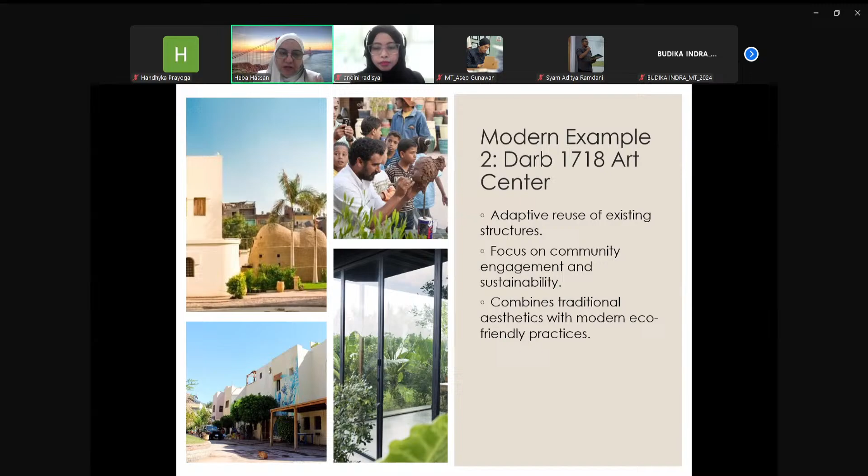Combines the traditional aesthetics with modern eco-friendly practices. They are using it to engage the community with an art and architecture center. So it is a good example for engaging the environment and having the sustainable and resilient for a long time.

Our third example for the modern examples is Gouna Film Festival buildings. It is a sustainable construction in a tourism hub, and they used it as a sustainable construction for the Gouna Film Festival. There is the use of renewable energy and innovative water management.

They promote green architecture in the hospitality industry. It is like an annual festival for film. It is really a good example for sustainable and resilient buildings. It really saves energy, and it has a good architecture style.

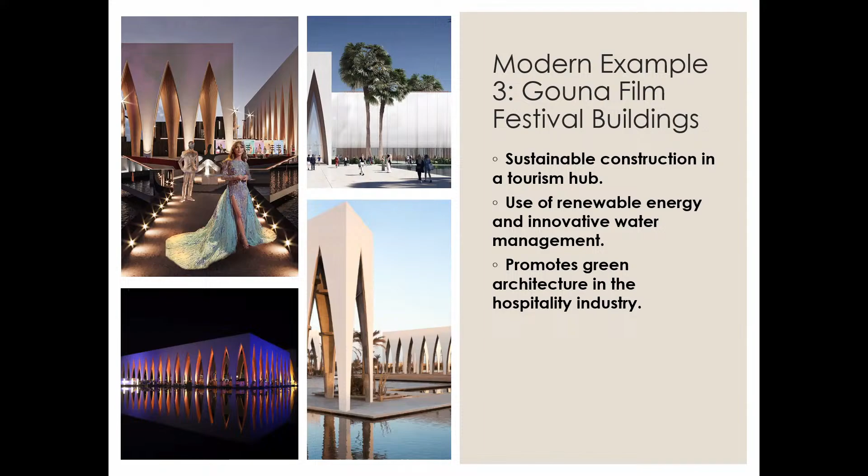Our LEED certified buildings in Egypt - the LEED certification recognizes buildings that meet high sustainability standards. Egypt is home to several LEED certified buildings, setting benchmarks for green construction. So I will show you some case studies that gained the LEED certification. If you want to know more, the LEED certification is a certification for buildings that meet many criteria to reach sustainability and green buildings.

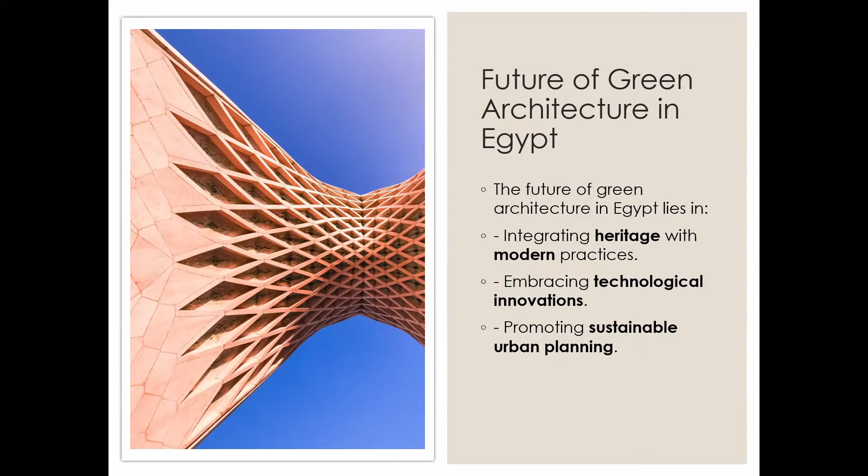Also embracing technological innovations, promoting sustainable urban planning. So we should integrate all three of them to reach the future architecture and future architecture innovation in Egypt. My conclusion and call to action is that green architecture is essential.

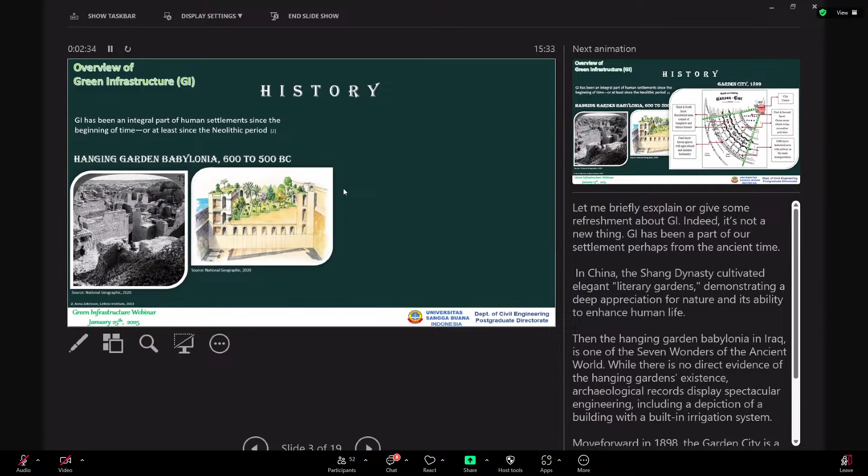In China, the Shang dynasty actually cultivated elegant literary gardens, demonstrating a deep appreciation for nature and its ability to enhance human life. Then the Hanging Gardens of Babylon in Iraq is also one of the proofs of green infrastructure in the ancient age.

And then by the time, there was the proposal from Sir Ebenezer Howard - if you are an architect, I think you're familiar with this concept, the garden city. Ebenezer Howard proposed that we should have a separation between the residential and the industrial area, and also the green part. From this moment, people started to understand about green infrastructure.

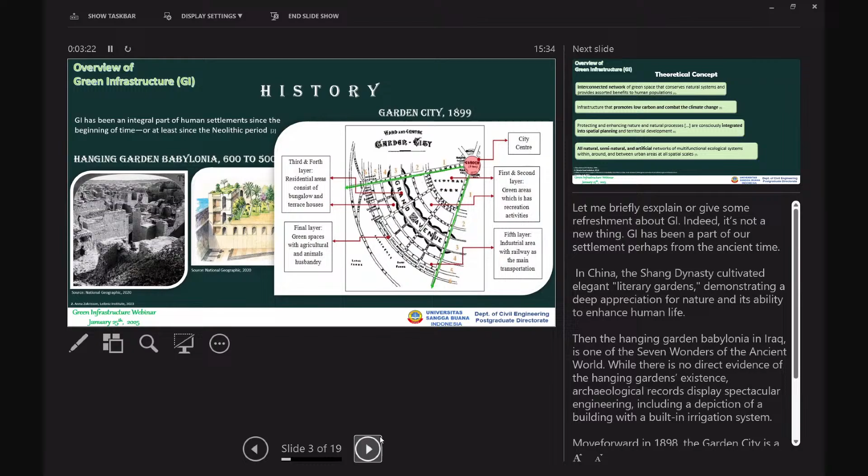This is a little bit of a theoretical concept I would like to introduce to you if your background is not from planning or architecture.

Green infrastructure is the interconnected network of green space that conserves natural systems and provides assorted benefits to the human population. This is the kind of grand theory in green infrastructure.

The second theory is that GI promotes low carbon and combats climate change. The next is that GI should be integrated into spatial planning. And the last theory is that GI is all natural, semi-natural, and artificial network.

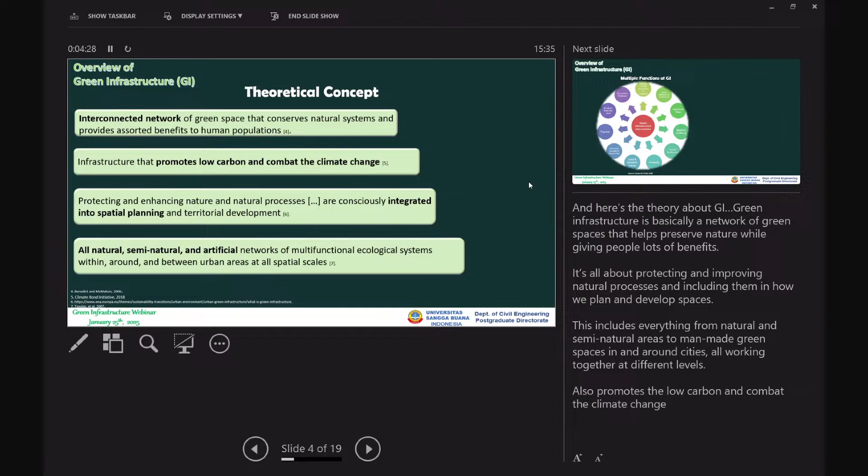So basically, green infrastructure is an infrastructure that connects us with the gray, and also with the support of the blue infrastructure. It cannot stand alone. It's supposed to be supported by green, gray, and blue infrastructure.

Here is the multiple function of green infrastructure, ranging from flood management, climate change adaptation, and recreation and leisure. There are many functions of green infrastructure.

Here are the types of green infrastructure, from bioswale and constructed wetland until riparian buffer - all of them talk about greenery. But actually, the type of green infrastructure is not limited to this list.

It really depends on the situation in the country and the priority. For example, if the priority is about energy, then the green infrastructure will be green energy. So do not limit your perspective about green infrastructure only to this list.

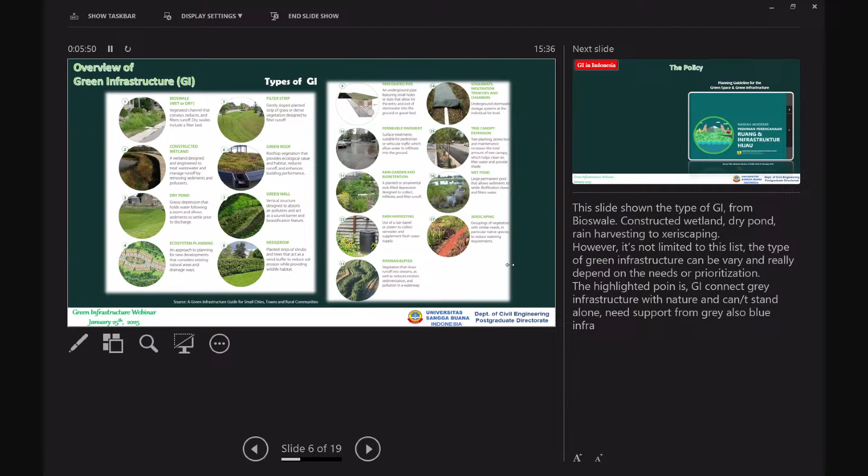In Indonesia, we already have the guideline about green infrastructure since 2018. And the guideline is derived from regulation, law, presidential decree, ministerial regulation, national standard, and also technical regulation.

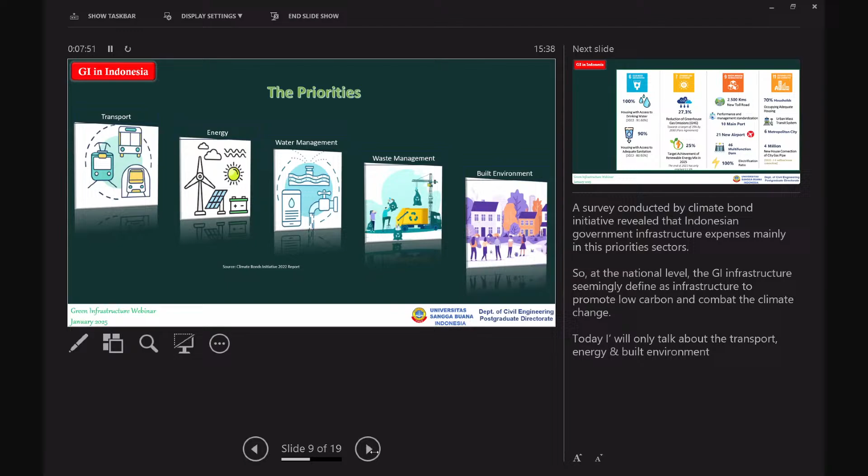Let's take a look at the case study about green transport in Indonesia. Indonesia has toll road construction, already 2,816 kilometers by mid 2024. And since 2020, the Ministry of Public Works and Housing has launched the Sustainable Toll Road Policy.

What is the sustainable toll road policy actually? The toll road managers plant trees along the toll roads, and the total number of trees already planted along the toll roads of Indonesia is 162,011. These are trembesi trees, well known as very effective to absorb vehicle carbon emissions.

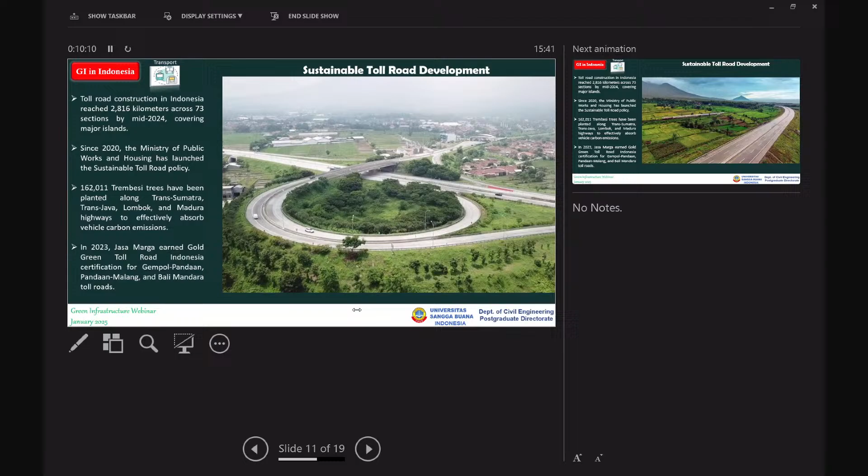The next is the Pandaan Malang toll road, also with very beautiful scenery. And the last one is the Bali Mandara, which combines green, blue, and gray infrastructure.

Sister Heba, you should come to Indonesia - I'm going to bring you to this place. Very pretty, inshallah.

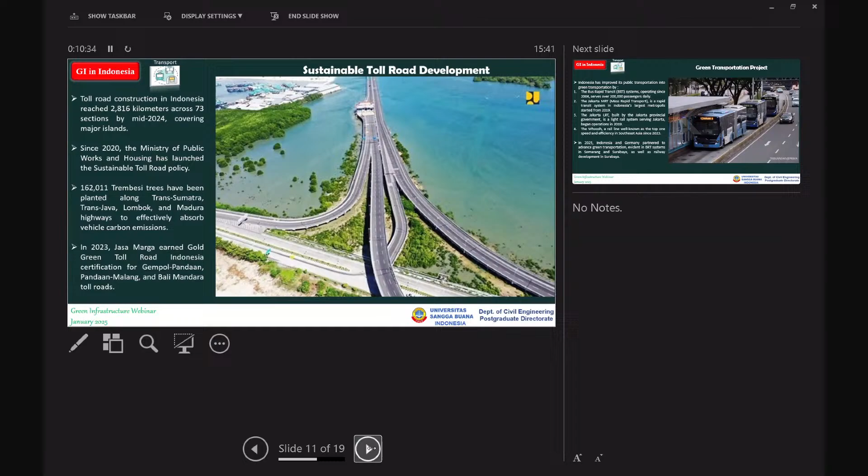I hope so, inshallah. This is my dream. Now, another thing about green transportation project that we have mass and rapid transportation.

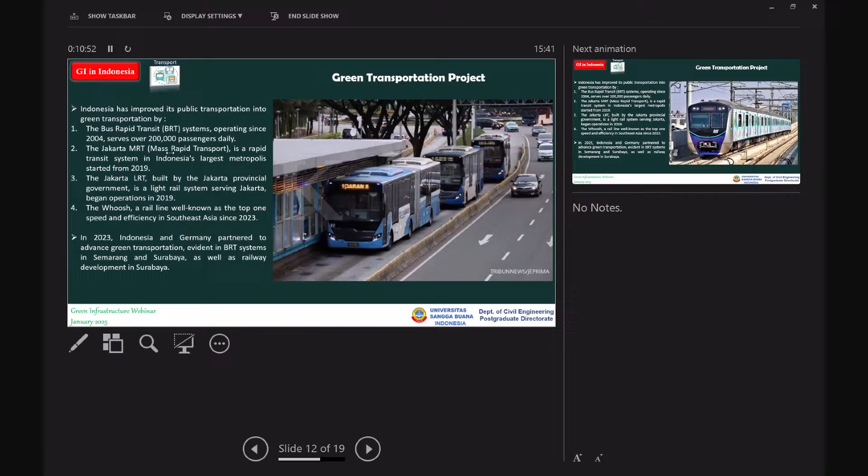First we have the bus rapid transit, second we have mass rapid transportation, third we have the LRT, light rail transit, and recently just operating is the Whoosh, which is like Shinkansen, a very high speed train, a cooperation between Chinese government and Indonesia.

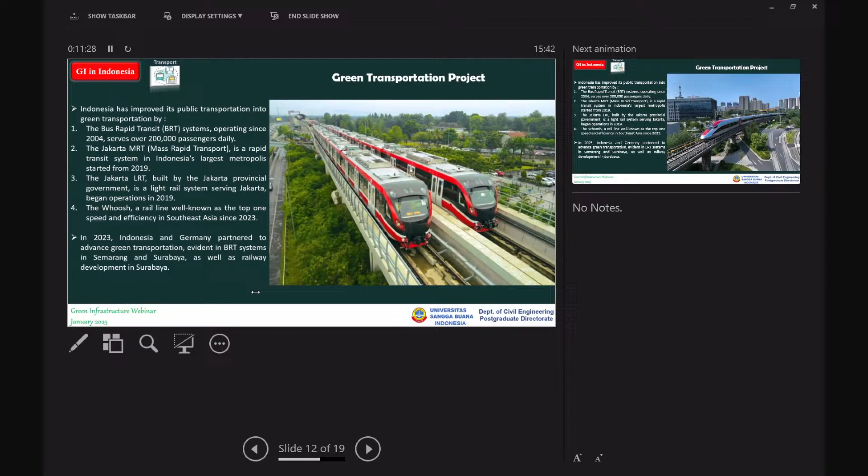In 2023, Indonesia and Germany partnered to advance green transportation. The evidence is the BRT system in Semarang and Surabaya, as well as railway in Surabaya province. This is the Whoosh Shinkansen.

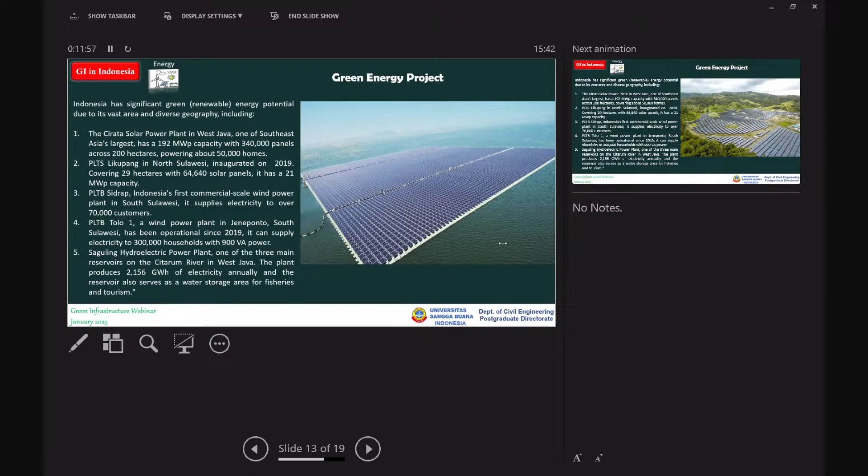The second is the green energy project. Indonesia has significant green energy potential due to its vast area and diverse geography. First, we have Cirata Solar Power Plant in West Java. This is a floating power plant and can produce about 340,000 panels, 192 MWp capacity.

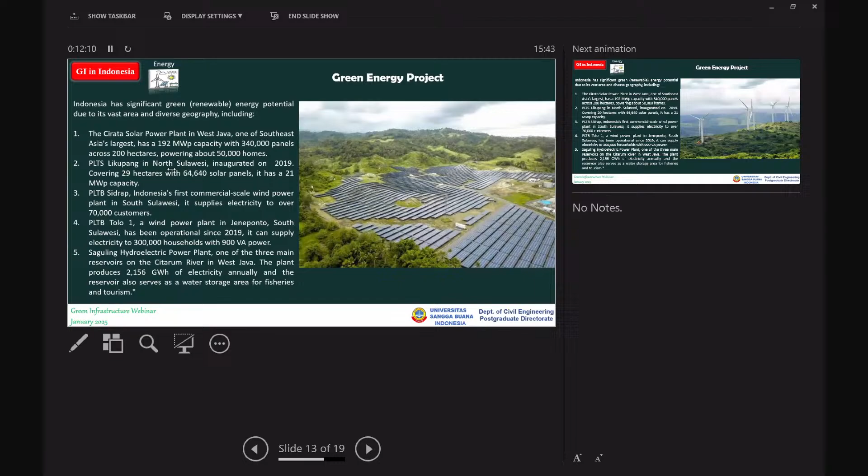Second, we have the PLTS Likupang in North Sulawesi, producing about 21 MWP capacity. Third, we have PLTB Sidrap, the wind turbine power plant in South Sulawesi. This is in my hometown, Sister Heba.

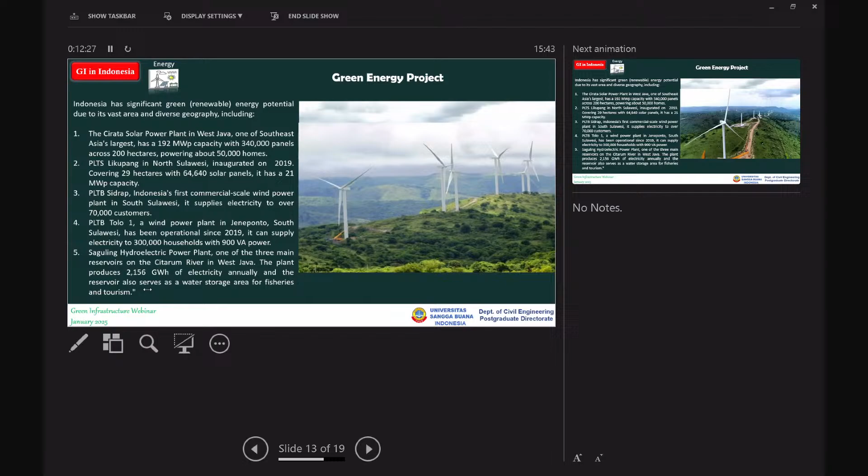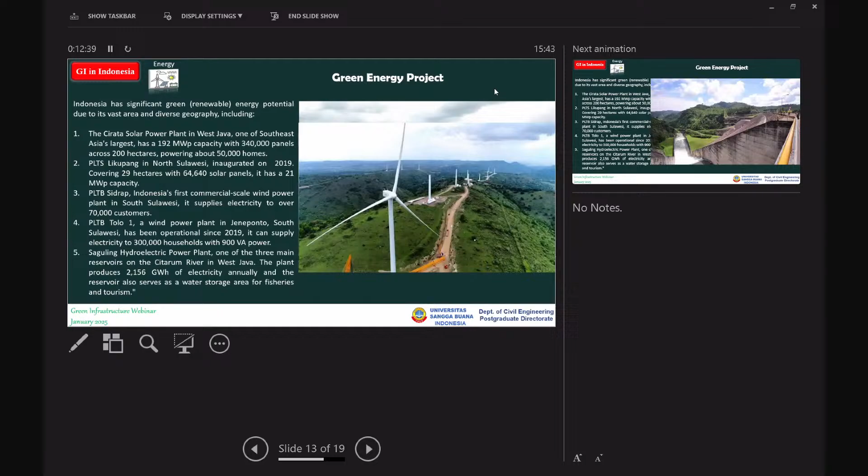Fifth is the Saguling hydroelectric power plant, similar to the previous one. So this is our green energy project. Our government invests a lot in this infrastructure. The Saguling plant is in Bandung, West Java. This is the water resources energy.

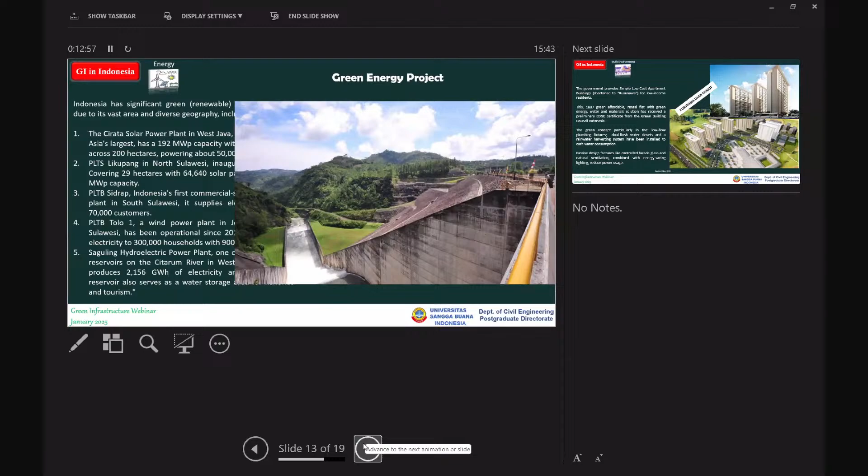Another thing is about built environment. Our government also invests a lot in this infrastructure. They built these simple, low-cost apartment buildings for low-income residents. The amazing thing is that this apartment is a green building.

So how do they call it a green building? Because it has low flow plumbing fixtures, a dual flush water closet, and a rainwater harvesting system installed to curb water consumption. Another thing is the passive design, like controlled facade glass and natural ventilation, combined with energy saving lighting, also reduce power usage.

But only people with low income can rent this apartment. Unfortunately, I cannot stay here. But we can adopt the idea, isn't it?

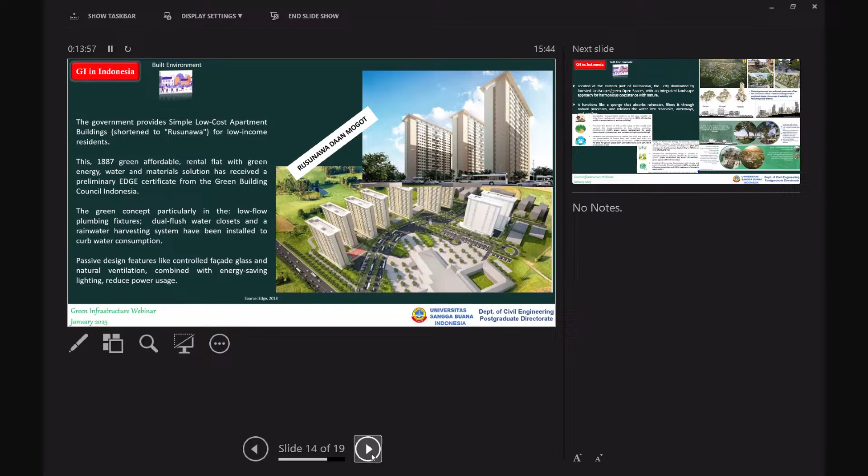As I told you, Indonesia's capital is moved to an island named Kalimantan, so they call it IKN. It's located at the eastern part of Kalimantan and the city is dominated by forest. So we start to build the area from scratch.

What kind of sustainability do we have in that new capital of Indonesia? We have the sustainable transportation policy. They plan to have electric vehicles in the area, all of the people are going to use electric vehicles. Then they preserve the forest because they need to preserve it, and because of the forest, it needs to act as a sponge.

You know the concept of the sponge city, I think in Singapore, they absorb the water in order not to get flooded. They also have the concept of the usage of renewable energy there, and the infrastructure development design adapts to natural conditions. So very close to nature, this new capital really connects people to nature.

So here is the plan and the design.

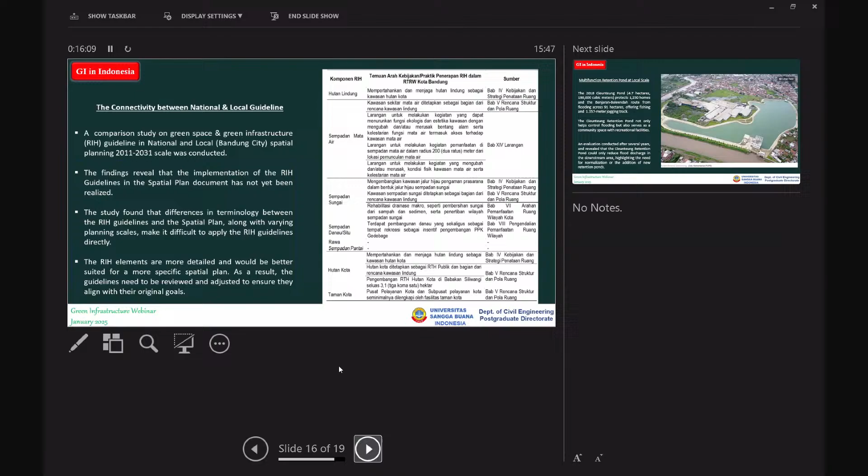Research conducted on this retention pond after several years found that the pond cannot accommodate the rainwater anymore, it's already over capacity. That's why the government function to do so-called maintenance doesn't work well in this case. So yeah, it's still homework for us here. Doing maintenance for public infrastructure is one of our weaknesses.

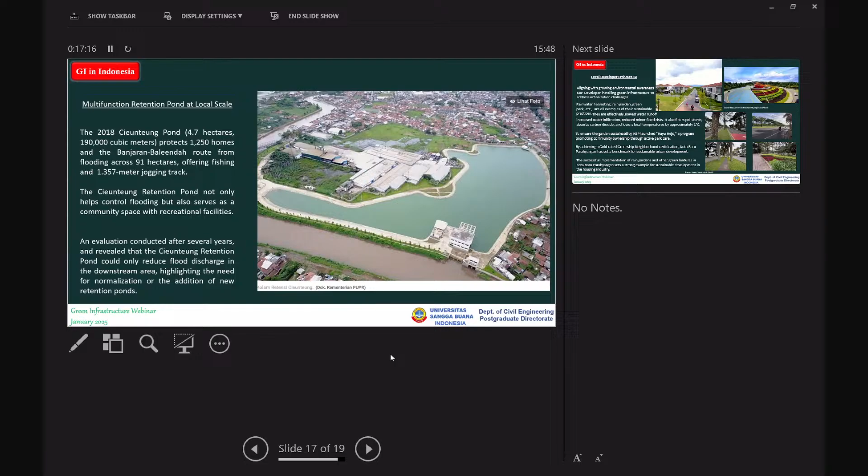And I think this is the last case study. So the local developer embraced green infrastructure. There's one housing called Kota Baru Parahyangan, or New City in Parahyangan. They built this housing and integrated it with nature.

So it's really nice, isn't it? It is important to have green open space in any area in order to help us combat climate change, to lower the temperature. In this area, they have a community program which invites the community to participate in maintaining or taking care of the green infrastructure.

They call it Hayu Hejo. Surprisingly, the community is excited to join any activity held by the management. This housing also got a gold green certificate by embracing green infrastructure. So that's all, the case study from Indonesia. Thank you very much.

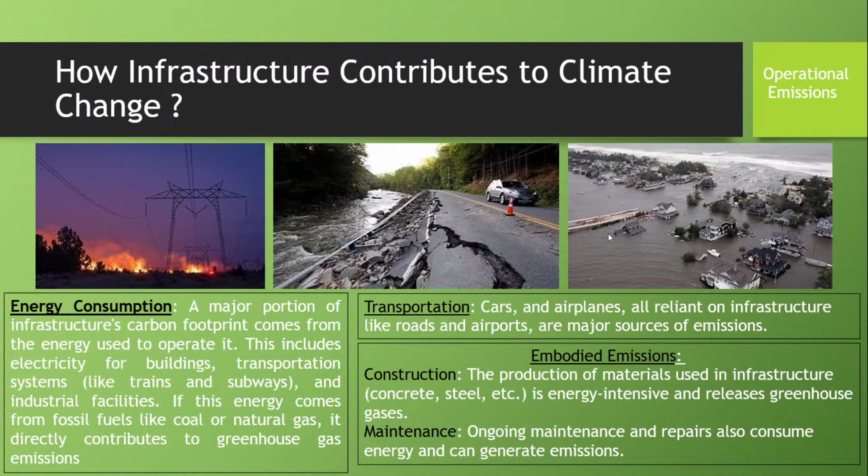It directly makes greenhouse gas emissions. Another thing is transportation, from cars, airplanes, or other vehicles, which makes a bad, negative impact of carbon footprint. And another one is construction, from steel, concrete, production of material which we really need to make our buildings with new techniques.

So if we transform that to green infrastructure, I think we will make the new approach which all countries are really trying to do, which is adaptation. Adaptation will happen when we try to improve our infrastructure to be green. So we need to know how to make it green.

There is thinking that by 2050, 20% of the world will find a risk of flood. All of these pictures represent not only buildings, not only emissions, not only the nature of our plants, but they are all part of the main circle. So we have to control our life depending on what we really find.

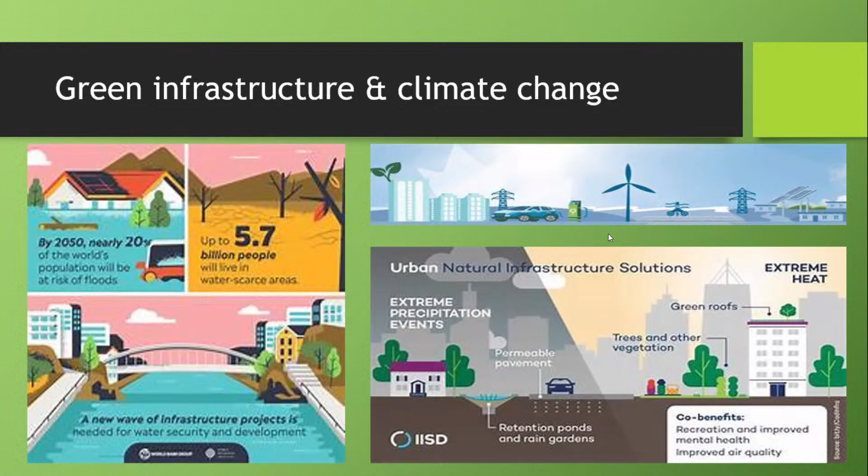Let's talk about the timeline of finding this definition. Green infrastructure is both a modern and a traditional approach. Modern approach, we find now this definition in urban planning. Green infrastructure is a key component process in urban planning systems, focused on integrating nature to improve air quality and our biodiversity. But there is another thing, which is technological advance.

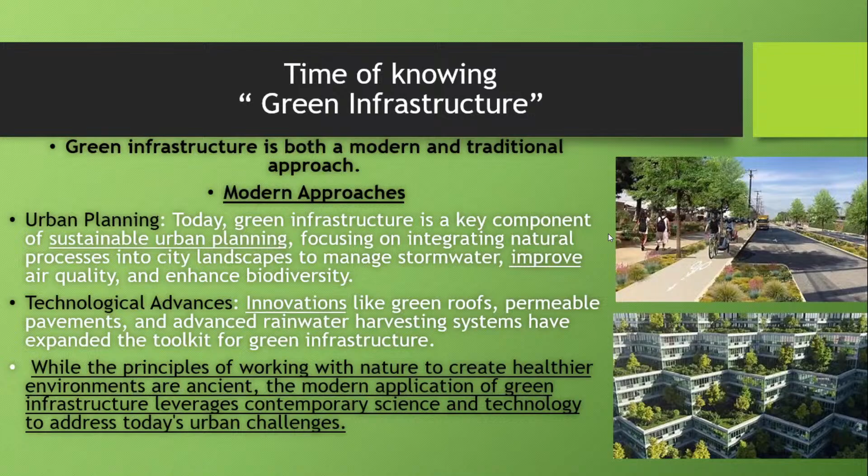It's about innovation like green roofs, permeable pavements, and rainwater harvesting systems. These principles are new, which we're really trying to do these days. But actually, green infrastructure is an ancient practice.

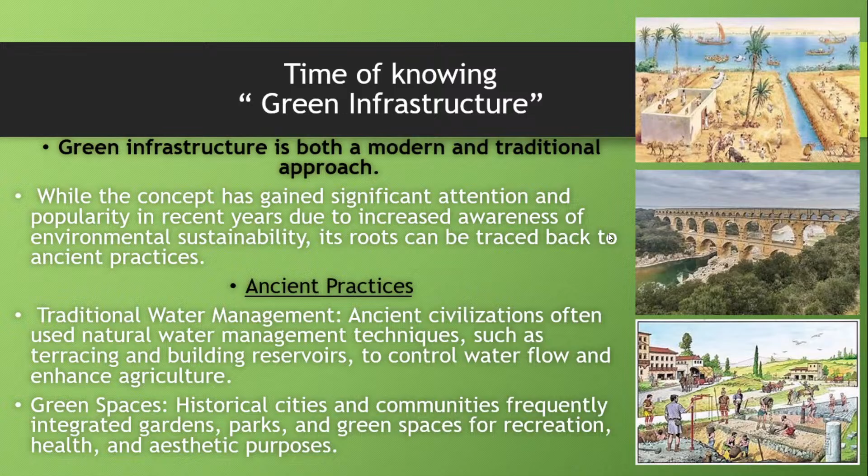So it's not a new approach, it's not a new or modern approach. It was an ancient civilization practice, but applied in different ways.

So green life can be defined as a way of living supported by a network of natural and semi-natural features. Green life, according to green infrastructure, is about living in harmony with nature, which we are trying to design in urban planning or environmental architecture.

Green infrastructure refers to the strategy of using natural systems, parks, trees, wetlands, and green roofs to manage storm water, improve water quality, and create more livable urban spaces. Community green life can be achieved through resilience and benefits from natural elements.

So let's define green infrastructure to outline the main points which we can achieve or improve for our communities. There are some elements: storm water management techniques like rain gardens, green roofs and permeable pavements; urban green spaces such as parks, community gardens, and greenways for biodiversity; tree canopy and urban forestry, planting and maintaining trees to improve air quality, reduce CO2 emissions, and provide shade.

Green roofs and walls, insulating building roofs and walls to reduce energy consumption and manage storm water. Sustainable transportation, promoting walking, cycling, and public transit to reduce emissions. Habitat restoration of natural habitats to support biodiversity. Energy efficiency, using renewable energy sources and energy efficient technologies in buildings and infrastructure.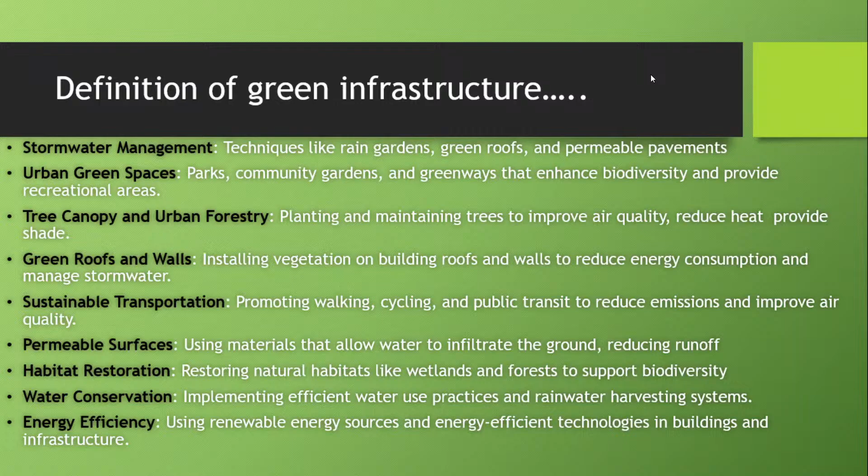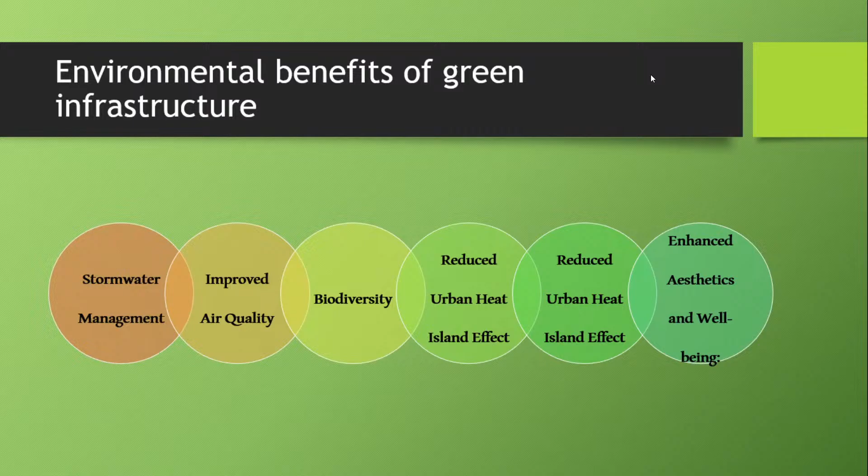So there are environmental benefits and social benefits of green infrastructure. We need to know them to complete this vision and improve our life to be green communities. It depends on some elements: stormwater management, improving air quality, biodiversity, and reducing urban heat island effect. I will not talk about all of this, but I chose some main points from environmental benefits. The main one is reducing urban heat island effect.

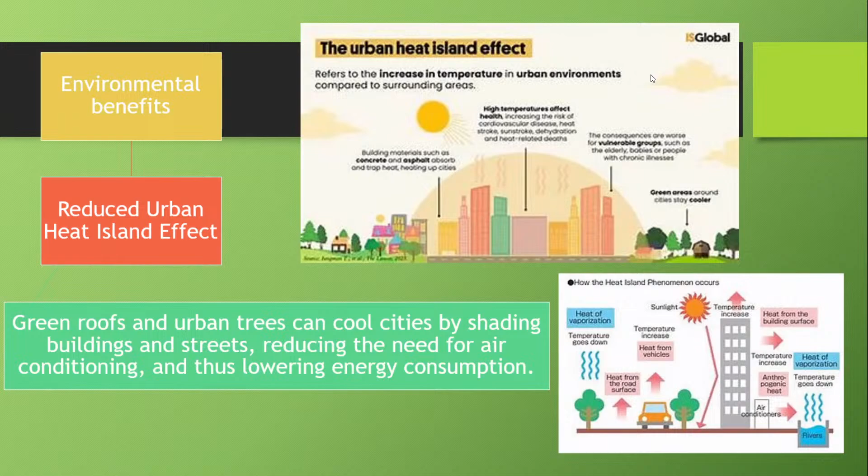If we work on these points, we can reduce CO2 emissions and save our planet, which will be in a huge problem if we get another 2 degrees. The main point is trying to solve any problem we can find through urban planning or environmental architecture. The other one is climate change mitigation.

Mitigation and adaptation are the new modern approaches we are trying to move on these days, trying to decrease the main negative impacts on our planet depending on our lifestyle.

Building design, urban design, or our operations inside our buildings. Trees and green spaces can absorb carbon dioxide, helping to mitigate climate change.

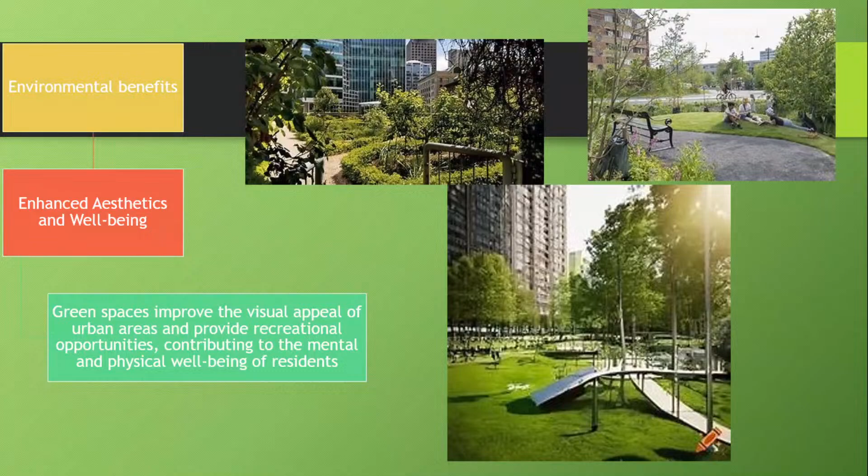The last one we will talk about in environmental benefits is enhancing well-being. We can't differentiate, there is no difference between our community life depending on social benefits and environmental benefits. We're trying through green spaces to improve visual appeal to urban areas and provide recreational opportunities, contributing to mental and physical well-being.

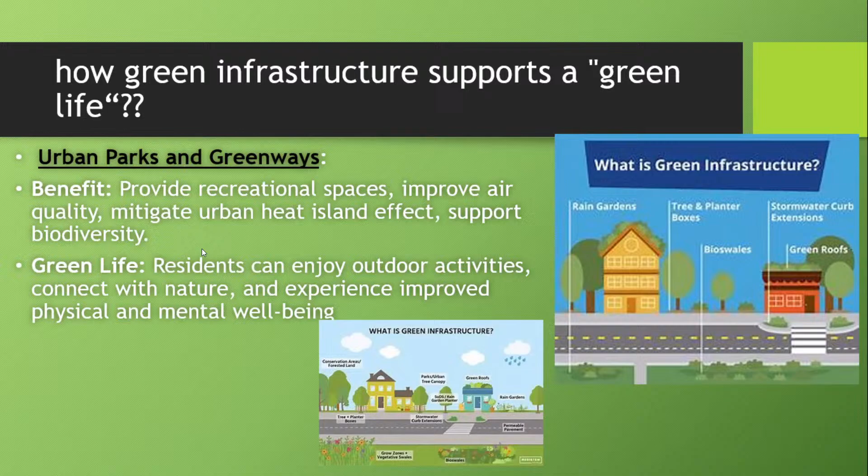Green life depends on residents being able to enjoy outdoor activities and connect with nature, having experiences that improve physical and mental well-being. Green roofs and walls provide benefits like reducing stormwater runoff, cooling buildings, and creating habitat for wildlife.

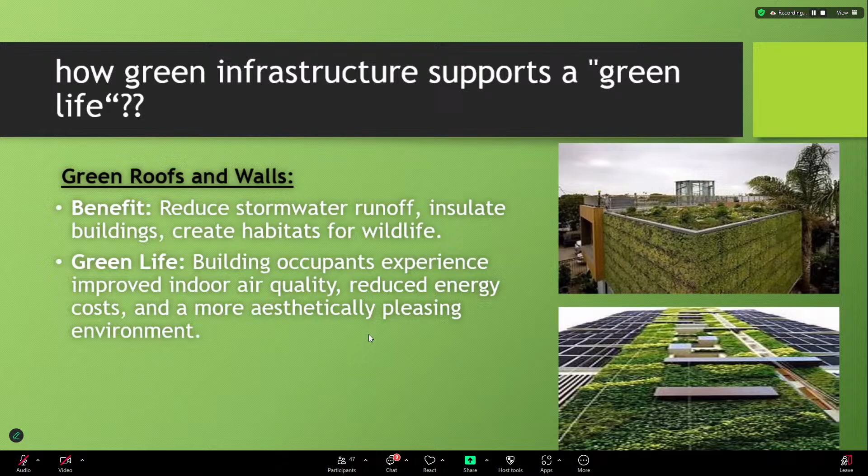Green life happens when building occupants experience improved indoor air quality, reduced energy cost, and a more pleasing environment. If we talk about pavements, pavements have a main role in CO2 emission.

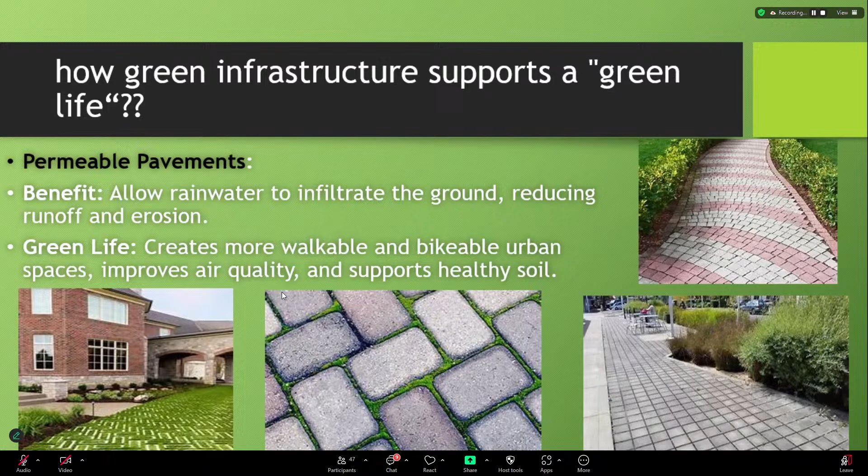If we allow rainwater to infiltrate the ground, reducing runoff and erosion, green life will create more walkable and bikeable urban spaces, improve air quality, and support healthy soil.

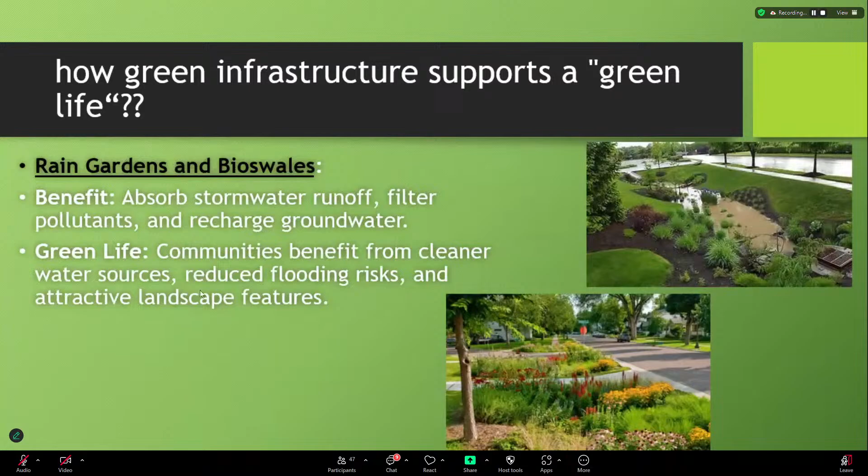Rain gardens and bioswales absorb stormwater runoff, filter pollution, and recharge groundwater. To achieve green life, communities benefit from cleaner water sources, reduced flooding risk, and landscape features.

So, if we depend on green infrastructure, green life will mean a stronger connection with nature, recognizing the role of ecosystems in sustaining human well-being.

This includes living near green spaces, parks, forests, or wetlands, incorporating nature into built environments by designing green roofs, vertical gardens, and rain gardens, and minimizing the ecological footprint by reducing resource consumption and waste generation.

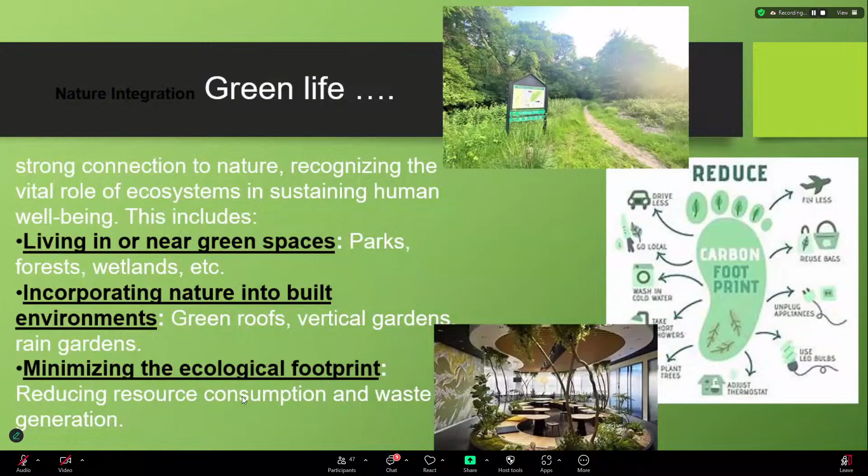I'll finish in just a minute. Sustainable infrastructure in green life means infrastructure that is designed and managed with sustainable transportation systems, water efficiency practices, and renewable energy sources.

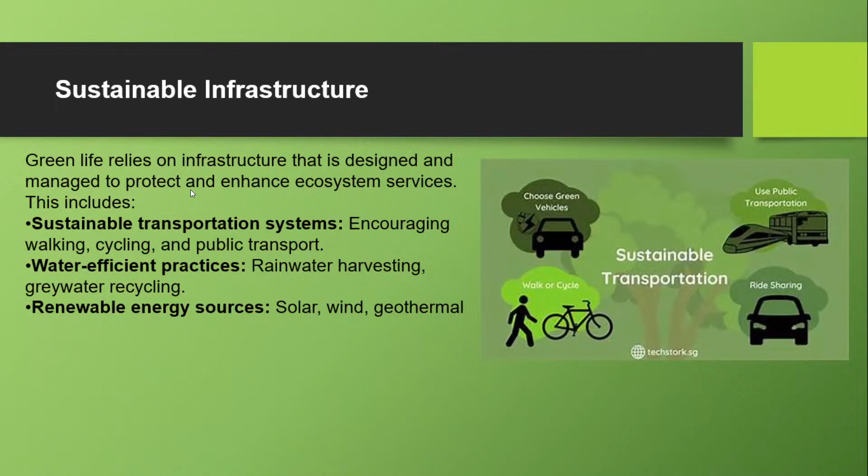Green infrastructure toward a greener life means expanding urban green spaces, promoting use of permeable surfaces, increasing urban tree canopy, and integrating green infrastructure. Thank you for your listening, and I hope my lecture was very useful to all of you.